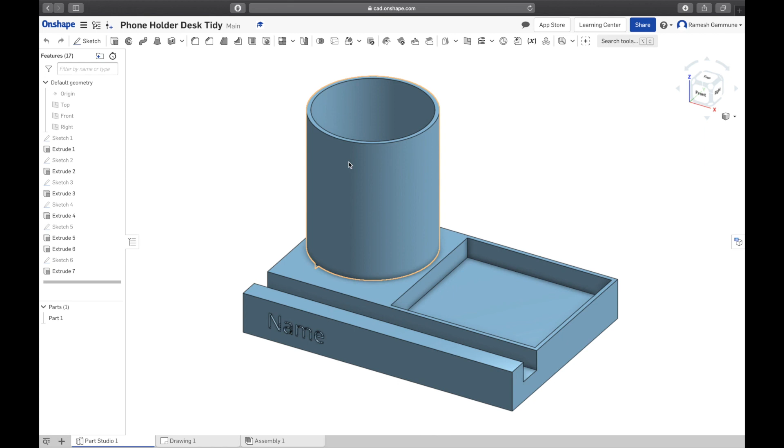I figured out that the best way for us to get to know the software is to actually make some little desk tidy. So your pencils and pens can go in there, your other bits and bobs can go in here, and down here is a little area for your phone to sit on, in landscape or portrait format, so you can watch videos while studying or whatever. It's small enough, and you got your name here too.

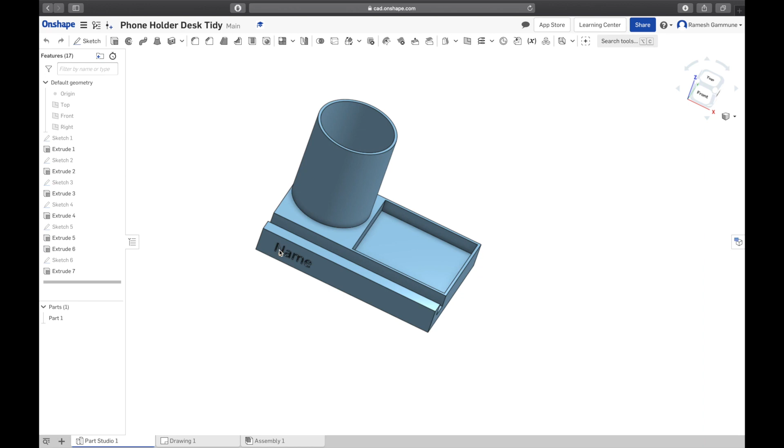It's small enough that we can 3D print these. We can 3D print up to 2 of these at a time on each printer. So I suggest you get this done, work with me, get this done together, and once we get back into school, you can print this out.

Alright, so let's go ahead and start making it. I'm going to break this up into a few videos. Today's video, we're just going to focus on the base and this cut, and then we'll slowly advance from there. By the end, we'll also have a drawing that we can work off, so we're going to refer to this drawing back and forth when we work this model.

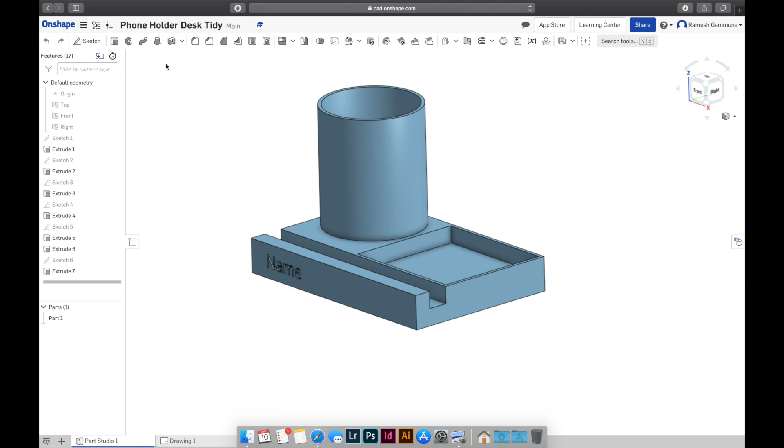Okay, so we're back on our Onshape homepage. As you can see, you've got your Onshape tutorials folder here, so I'm going to click that. It's going to take me to mine, well, yours should be empty. Mine's already got the tidy that I've done before, so I'm going to go ahead and create a new one.

I'm going to call that phone holder desk tidy. Now mine's a version 2, so underscore 2, because I've already done one before. Right, go ahead, hit enter.

Let's talk about how to actually make something on Onshape. Onshape is a parametric 3D modeling software, which means we got to set parameters and then model it. It's not a free modeling software like, say, 3ds Max or Maya. Every 3D object starts off as a 2D sketch, and just like in real life, we have to start sketching on a flat surface.

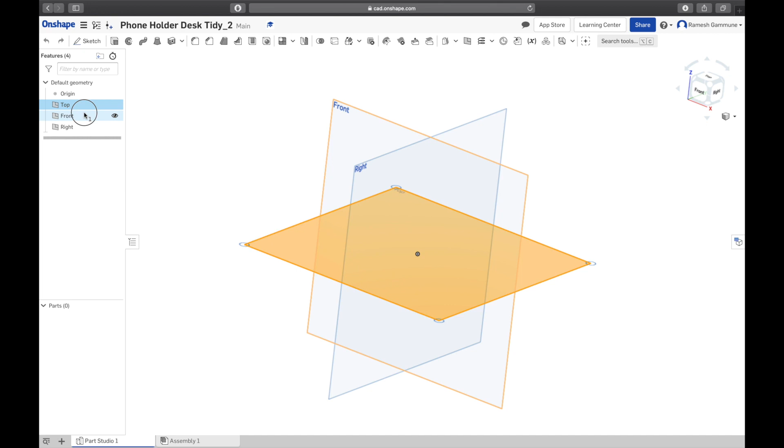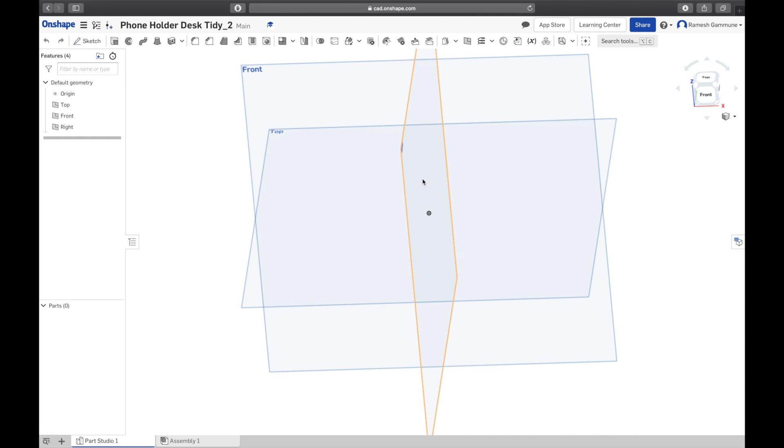Currently, we are in space. There are no flat surfaces in real life, but we are given 3 planes to sketch on. We got our top, front, and right planes, and we got our origin here. What you guys are used to is your X and your Y axes on your Cartesian plane. When you're working in 3D, you've got your Z axis, which operates 90 degrees to your X and Y axes. So we're working in 3 dimensions right now.

It's going to be a little difficult for some of you to get your head around, but guys, once you do, it's going to be so easy.

Alright, so we're going to start off by making the base. Like I said, let's look at the base. It's essentially a rectangle with a bit cut off over here. That's 140 by 95. It's 140 mil wide, 95 mil deep, and 20 mil tall. Remember, 2D sketch first, so we're going to draw a box that's 140 by 95.

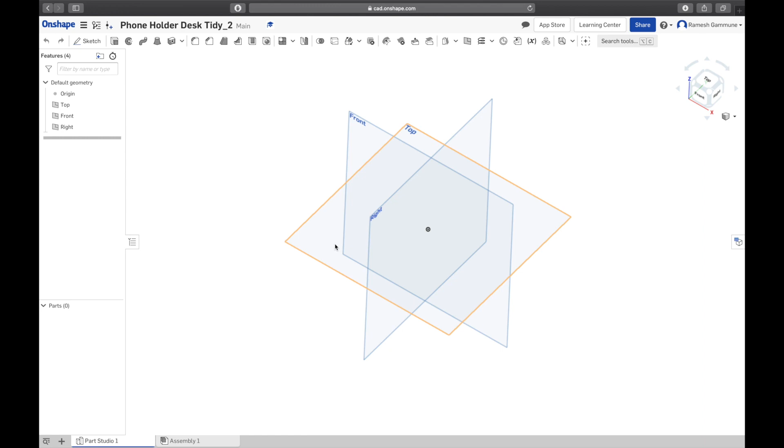Let's get that started. So I'm going to start drawing on the top plane and work up from that top plane. I'm going to hide the front and the right plane, and only have the top plane there. Now, how do we sketch something?

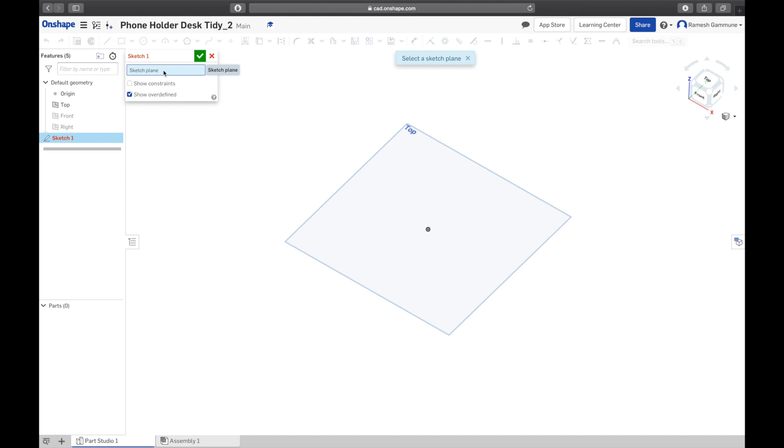See the sketch button over here, go ahead and click that. Now when you click it, you'll notice that everything else gets washed out. You can't select them, and it says select a sketch plane, which means we need to select a plane to draw on. We are going to select this top plane first, so click that, click top plane, and you'll see it populates that dialog box, and all of these are now accessible again.

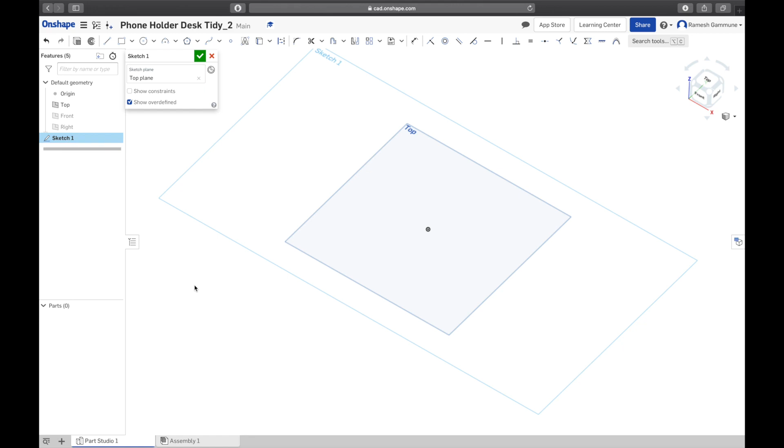Now I told you about good practice, this is my first big tip for you: right click on the space somewhere and go down to view normal to sketch plane. And there we go, we're looking directly down on the plane that we're sketching on. So we need to start off with a rectangle.

Today we are only going to look at this rectangle feature. Right, now by default it's on corner rectangle. We are going to go to center point rectangle.

You'd notice that if you hover your mouse over these buttons, it's gonna tell you what it really does. So this, it says center point rectangle R, create rectangle, blah blah blah. You can read it.

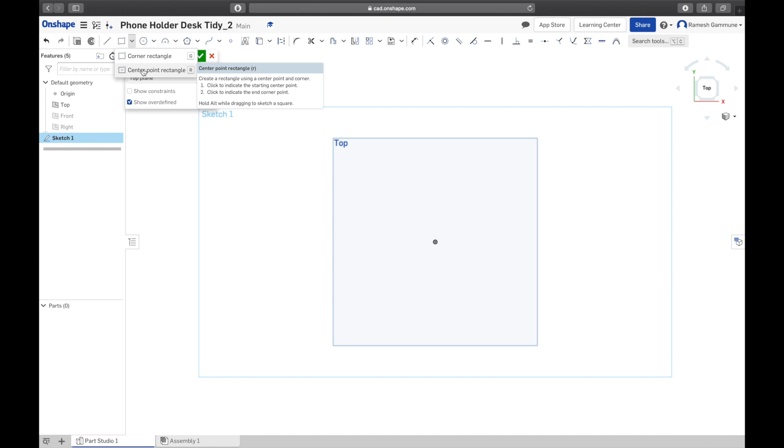We want the center point rectangle because we want to base our rectangle around this origin. That's why we didn't hide the origin. Second tip, good practice: you have to anchor your sketches around the origin, most of all the first sketch, because then your object is locked in space.

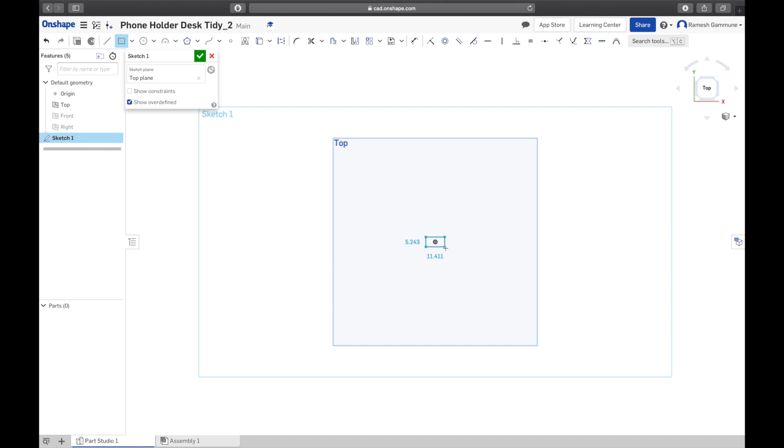Get the cursor near that origin, and you'll notice that it'll go yellow, and then when you're on it, there'll be a little rectangle around it, which means now if you draw, that center is going to be locked on the origin. So click and release, and then move the mouse and click again, and there's your rectangle.

Now if you accidentally click somewhere else, you're going to make more boxes. If you do that, don't freak out. Just go to this left arrow here on the top left, click, click, it undoes what you've done. That's because Onshape, once you let go of the function, is still locked onto this. To get out of it, all you have to do is hit escape, and then you're back to your normal mouse cursor.

Okay, so now we've got a rectangle, but it's not this rectangle. This rectangle is 140 by 95. Our rectangle is something random.

So the next thing we need to do is define this rectangle. We're going to do that by using this feature over here, the dimension feature. You can see two arrows with two lines across it. If you hover over it, it'll tell you what it does. Right, so click it.

Onshape has a sticky right click. So you click and let go, and it'll hold it down for you. So don't try to click and drag. So we're going to dimension the long side first.

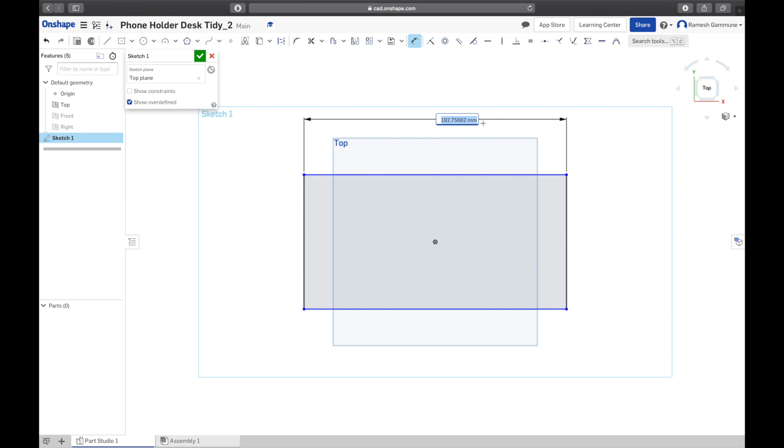Click, drag it up, and it'll convert it to a text box. And we want it to be 140 mil. 140, enter. Because we haven't clicked escape yet, we are still in the dimension tool. If you've accidentally gone out of it, just click the dimension tool again. So the short one, we want that to be 95. 95, enter. There we go.

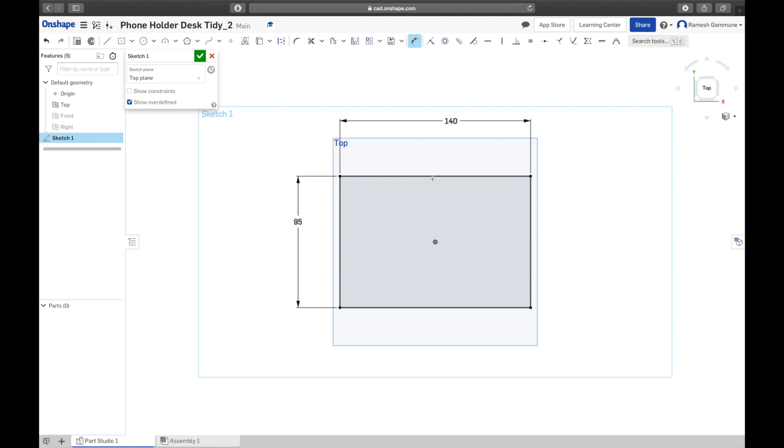Now you notice that our lines are no longer blue, they're black, which means they are defined. These things cannot be moved. To prove it, hit escape and try and move those lines. They won't move anywhere. So that's why we've centered it around the origin, and we've defined the sizes.

Okay, go ahead and click on the green tick now, and your sketch 1 is done. You can rotate it. You can see that sketch 1 is on the top plane.

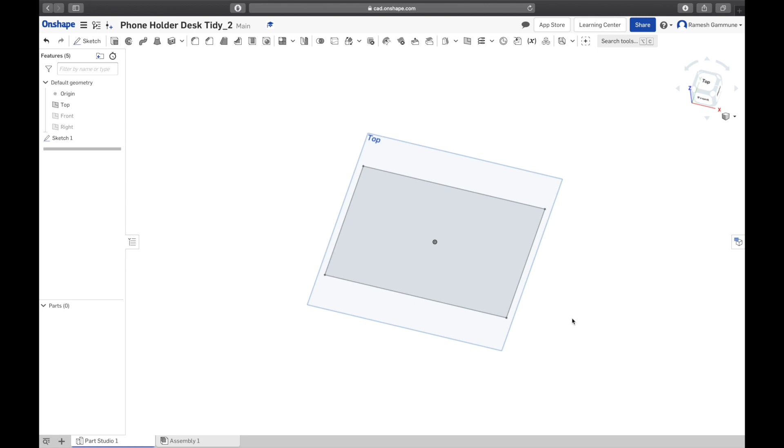Now the exciting part, we're going to make something in 3D, because you can do this in Microsoft Paint. Now we're going to 3Dify it. So we need to look back at our drawing and see this: it's 20 millimeters tall. Right, so we got to do that now.

So currently it is no millimeters tall because it's a 2D object. So right next to the sketch on the top left here, you'll see extrude. So all of these things, these are features, right? You can manipulate your 2D sketch to follow most of these things. But what we are interested in is extrude. So I'm going to go click extrude.

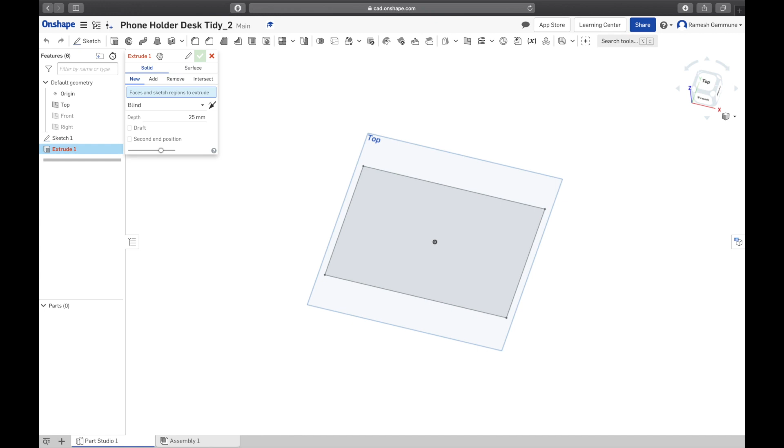And you'll notice this is extrude 1. You notice sketch 1, extrude 1. Next extrude is going to be called extrude 2. One after that, you guessed it, extrude 3. It's going to just continue like that. But you can also, if you want to, rename your thing.

Right, so extrude 1, same, we've got our tick, cross, solid, surface, new, add, remove, intersect. We are interested in solids, and new, add, and remove. These 4 functions are what we are going to be focusing on for this project. You got blind, depth. I'll tell you that when we use them, which is in about 5 seconds.

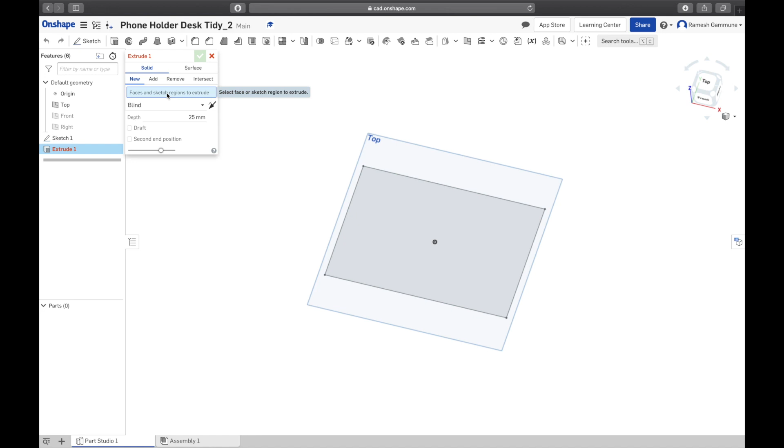Right, so we got faces over here. So we've drawn the sketch, faces and sketch regions to extrude. Click that, click the sketch, and there we go. It's gone ahead and extruded it. Extrude means pull, right? We're pulling that sketch and turning that 2D sketch into 3D.

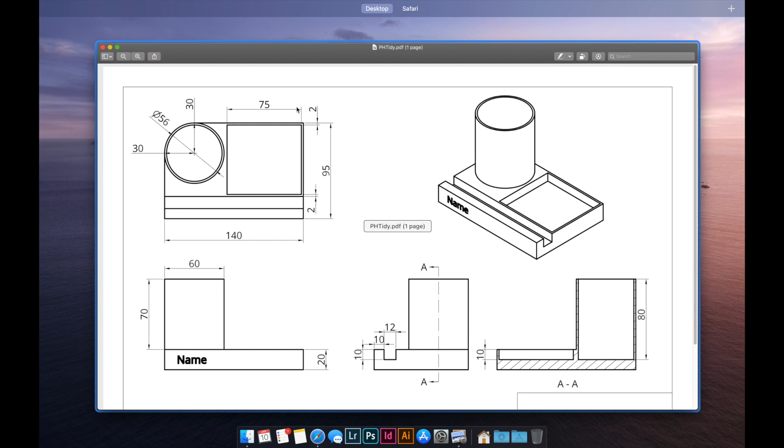But you can see it says blind, and the depth is 25. Now, what's our depth? Our depth is 20. We need to change that to 20.

Hit enter. Now you can hit enter, it's not going to go out of the sketch. If you do accidentally leave the sketch, go back to that, double click it, and it'll pop up again. Do not freak out.

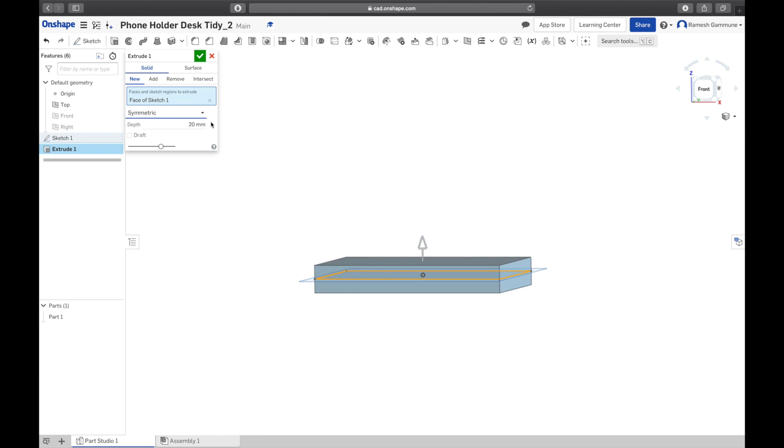We wanted to go to blind because we are going up in one direction. If you want to flip the direction, you can click this arrow over here, but we are working on top of the top plane, not below it. There's also symmetric, which goes in both directions, and the rest we can't use yet because we have nothing to follow. So, blind, 20 millimeters going up from the top plane, and click.

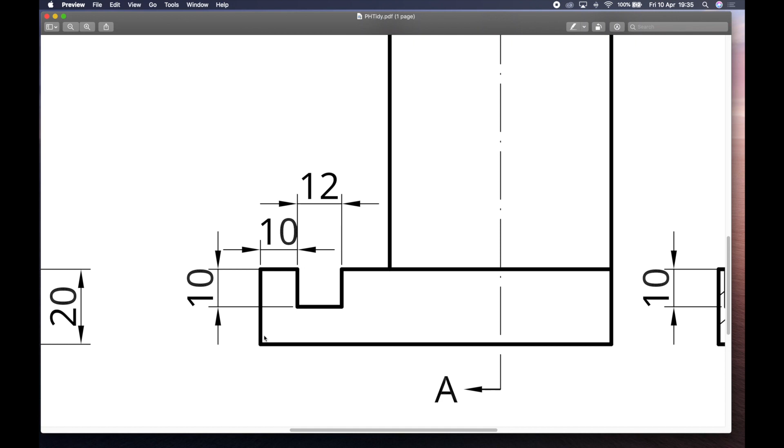Done, that's our base. Next thing we need to do is make this cut. This cut has a depth of 10 millimeters, a width of 12, and it's 10 mil behind the front face. Let's go and do that here. We're going to essentially draw that on this side and cut it.

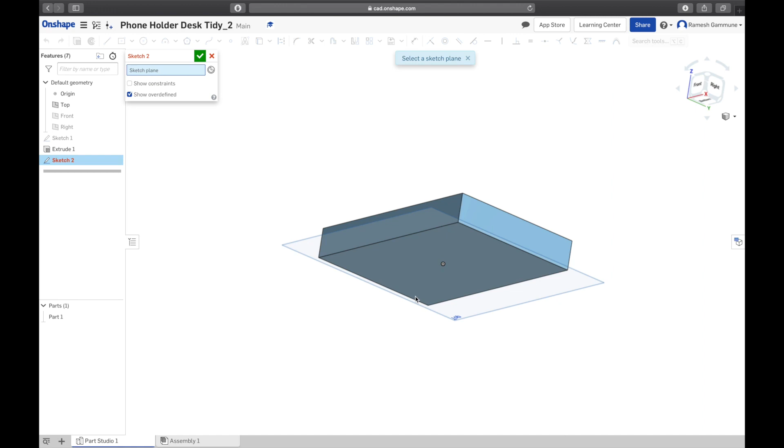So what do we start off with usually? We start off with a sketch. Now, sketch plane - well, we can't use a plane now, can we? Because if we use the top plane, we can't cut in that direction. So what we're going to do is, remember, we can sketch on any flat surface. We're going to select this side, which is the right side, and you'll see it'll say face of extrude 1. That sketch 2 plane has kind of planted itself on that face.

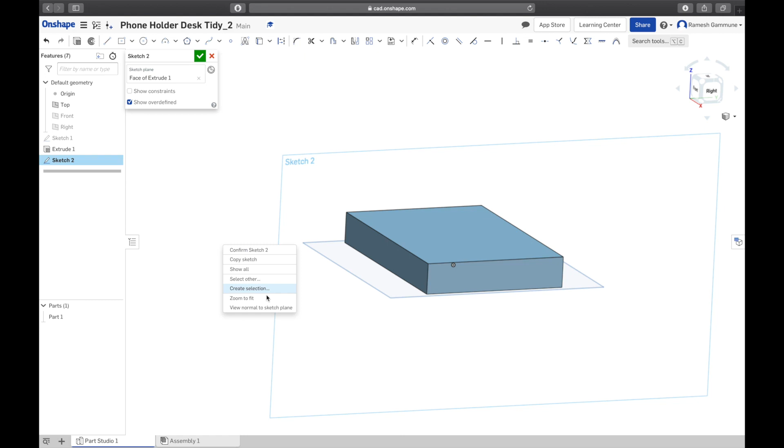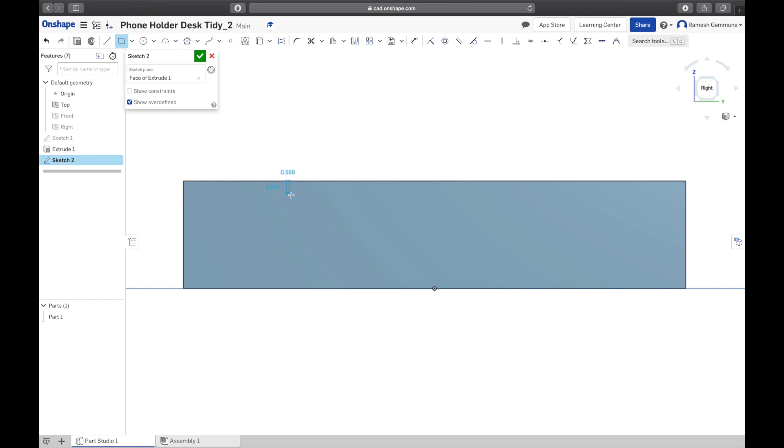Remember, good practice: right click, view normal to sketch, zooming in a bit, and we're going to pick the corner rectangle this time, not the center point, and you'll see why. I want to base that corner rectangle along this edge. You can do it anywhere along this edge because we are going to define it with dimensions after we've drawn it. Click, release, click - I've gone ahead and drawn a random rectangle. Go ahead and hit escape, dimension.

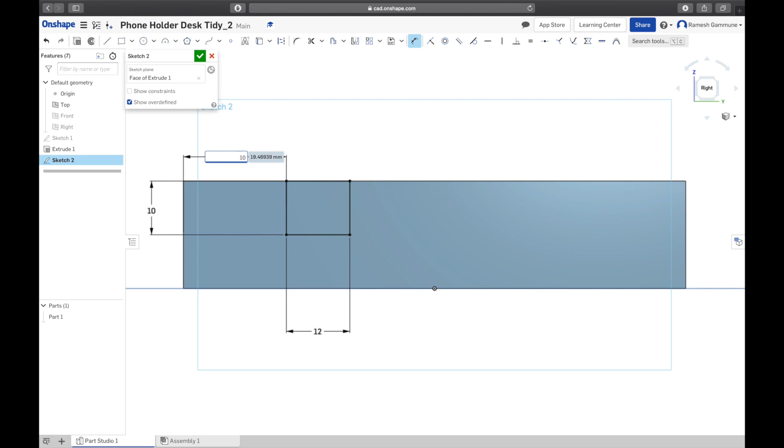Let's go with the depth first - that's the depth one. Click, release, out, 10, enter. Width: click, release, down, 12, enter. Now this is going to be tricky because we can't really select this edge, but we can select this edge. I'm going to click and ignore that 10, go till it highlights this edge, and there we go. Not 12, it's 10 in. Enter. There we go.

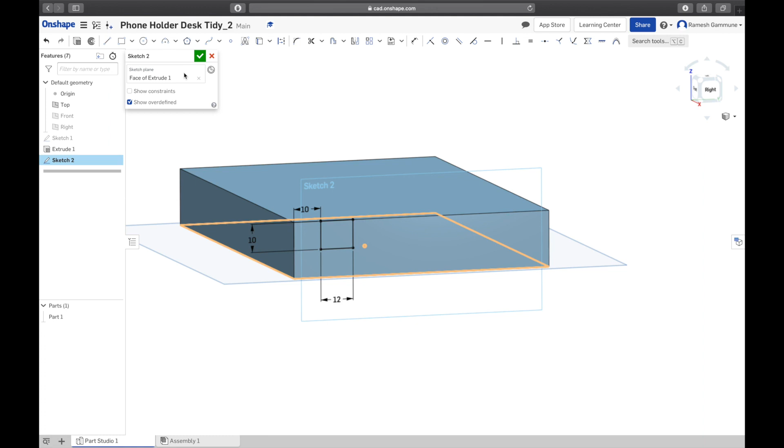Now you can hit escape to get rid of the dimension tool. You can see that that is fully defined because it's got black lines around it, it's not blue anymore. Once you're happy with that, guys, just again cross check: face, right side, good, we're in the correct thing. Tick - you can always go back to that sketch by double clicking it. Green, and now we're going to cut it.

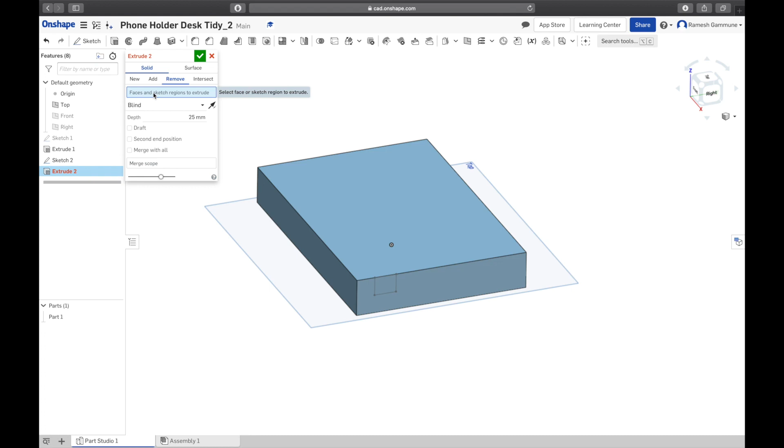Same feature, we're going to use the extrude function. Solid, new, add or remove. Remember, we are cutting, so we are going to remove - click remove. Faces and sketch regions to extrude: now you have to go ahead and click this, the new sketch. If you've accidentally clicked both of these, go ahead and delete these selections and click the correct one. There we go.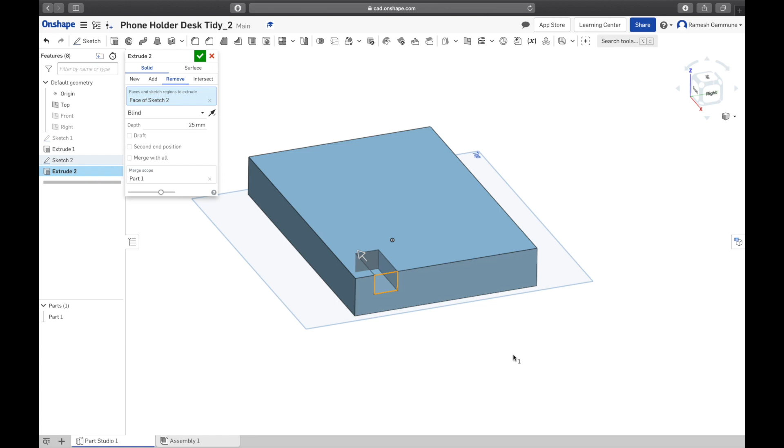You can see that it's done a cut at 25 mil deep - that is the program's default depth of extrusions. Here's a fun thing to do: you can grab this arrow and pull it all the way across. Done - one way to do it. Okay, bring it back down.

Next way to define the width: you can type in 140 and hit enter because that's our width. That's another way to do it. But the easiest way to do this, guys, is to go down on the drop down menu on blind and select through all, and it'll cut all of it.

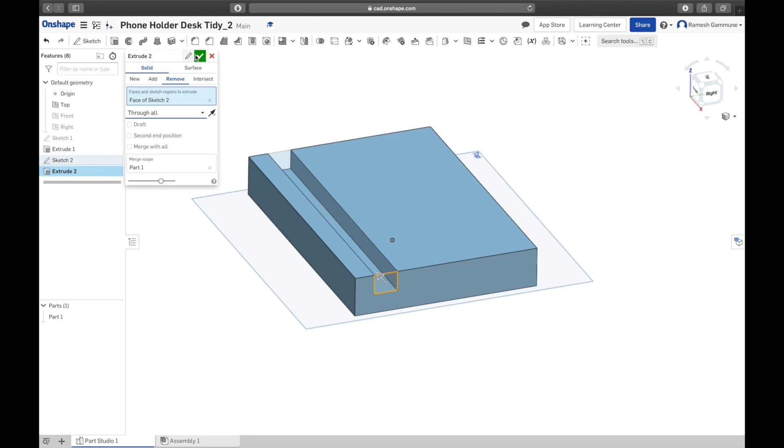Then go ahead and click the green tick, and well done - you made a base for a desk tidy. Well, actually what you've actually done is just made a phone stand, which is pretty impressive. Good job, guys. I think we'll leave this for today for this video, and we'll come back next video and we'll do the rest of it.